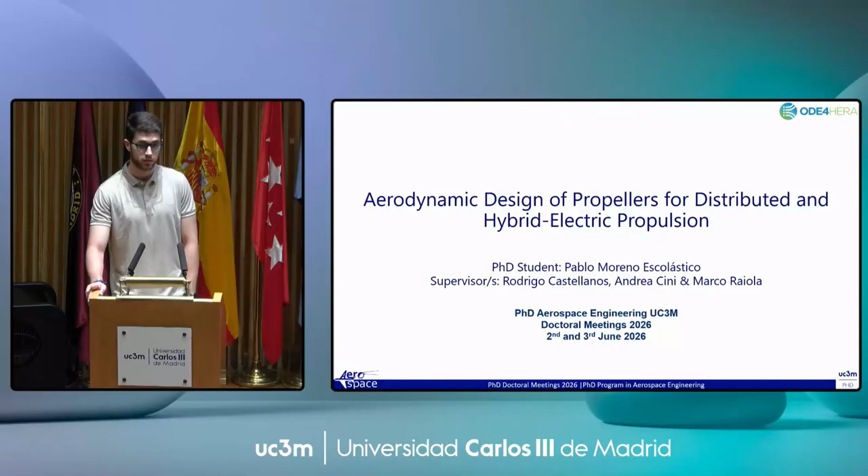My name is Pablo Moreno Escolástico. I'm working under the guidance of Rodrigo Castellanos, Andrea Cini, and Marco Raiola. And, well, even though today we'll be talking about propellers, I would reshape the title of this presentation to something more like Propulsion System Optimization for Sustainable Aviation.

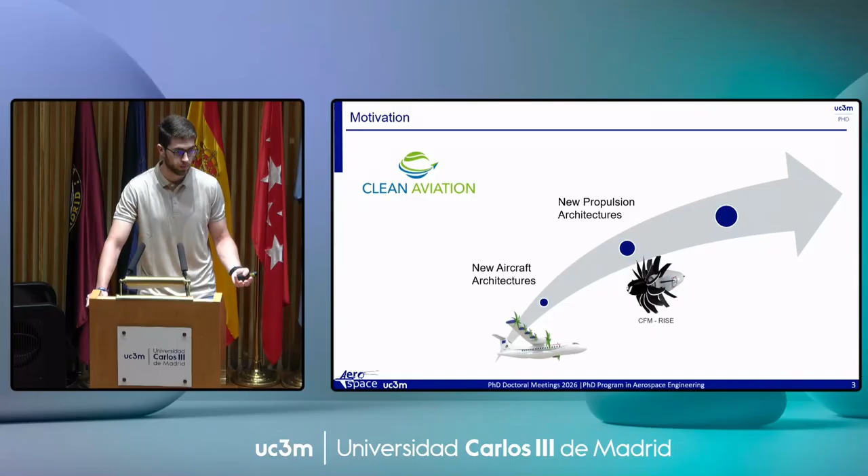Why? Okay. First, let's start with the motivation. As my colleagues have introduced before, especially Joao with the more innovative architectures and projects, especially under the umbrella of Clean Aviation here in Europe, these projects are pushing towards new aircraft architectures for more sustainable aviation and net zero emissions, which are pushing to have new propulsion architectures that are more efficient or with different arrangements than the ones that we know nowadays.

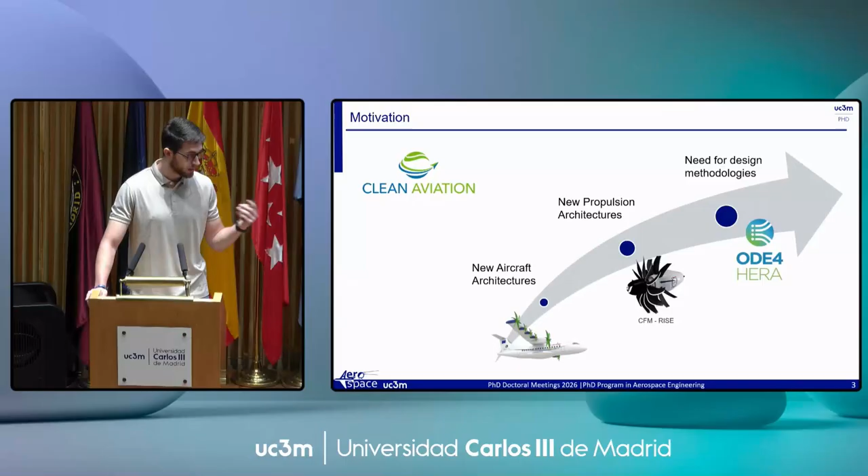This brings us to the need for new design methodologies, new design tools, which is indeed what we are trying to do in ODE4HERA, the project I'm working in, where we are trying to build an open digital environment for hybrid electric regional architecture. And all of this brings us to the question we want to answer, that is, how can we design the next generation of sustainable aviation propulsion systems?

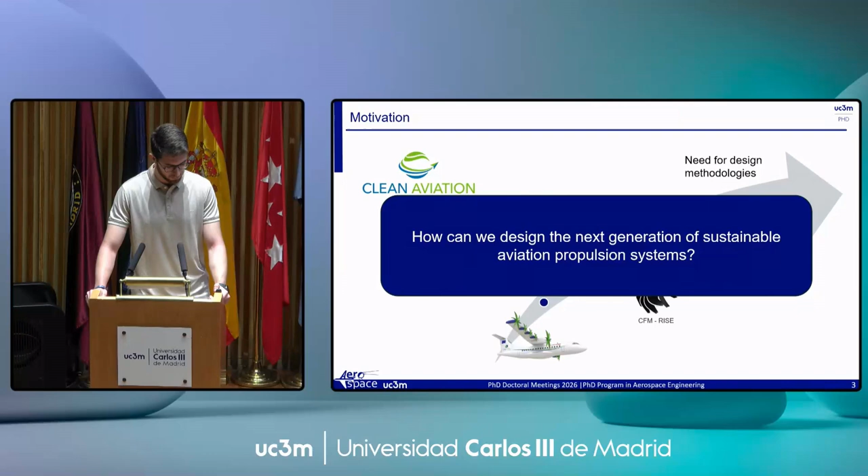For this, first we need to go to the state of the art. And here I would like to remark three main takes. First is that propulsion system design has become a more multidisciplinary problem, like the one that our colleague Raul published in 2024, where it is not only a multidisciplinary problem, but also a highly integrated problem within the airframe architecture.

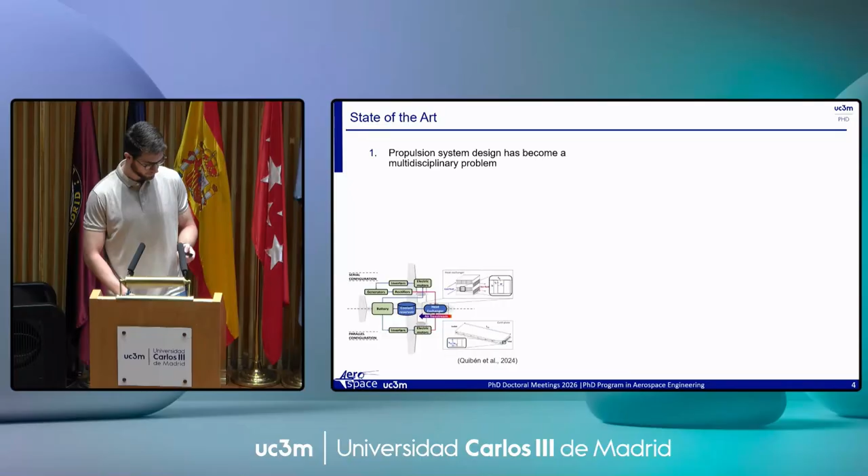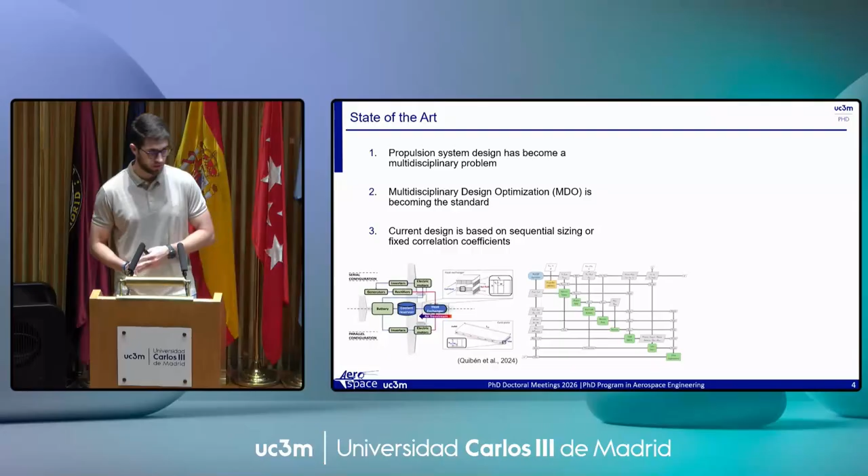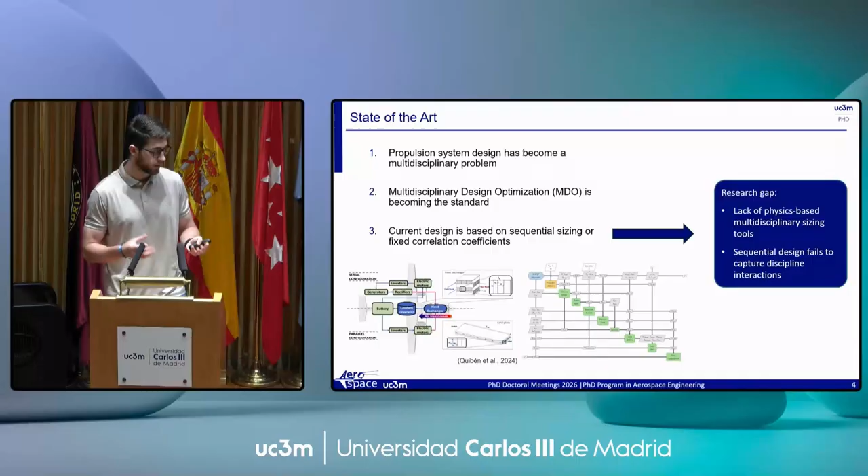Secondly, multidisciplinary design optimization, MDO, tools like GEMSEO that Joao mentioned, or OpenMDAO, are becoming the standard for this kind of analysis. However, current design tools and methodologies are based on either sequential sizing or fixed correlation coefficients. This poses two gaps, indeed. One is the lack of physics-based multidisciplinary sizing tools to have different performances along different conditions, and that sequential sizing design fails to capture multidisciplinary problems and the interactions between those subsystems and disciplines.

To address this, the objective is to build a preliminary design tool which is physics-based, to capture all the physics behind all the components, so all the system, but also perform simultaneous optimization to be able to understand all the interactions between all the systems and the components that are there, which are not few.

Then we want the design tool to be modular and incremental, to allow for as many architectures as possible, the different components, etc. So everyone can design their desired architecture with a few changes. And an important novelty of these tools would be that they will not only do mechanical sizing or mass estimation of the components, but we do both at the same time.

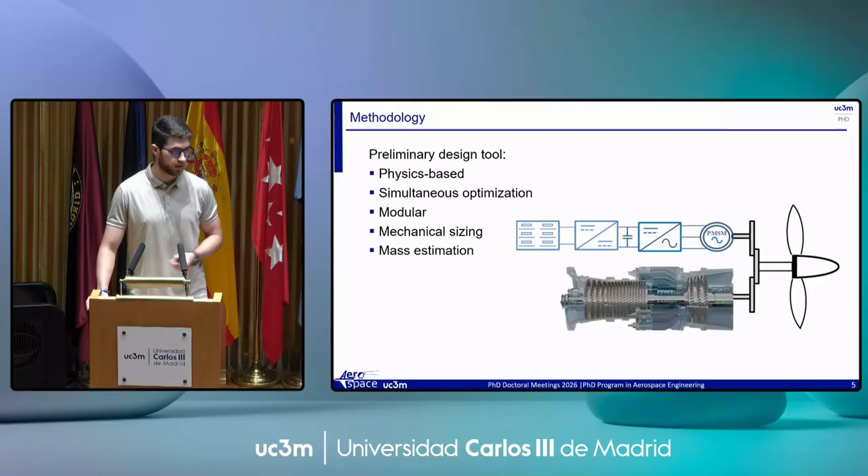However, a hybrid electric power plant is a very big system with very complicated dynamics, so we decided to split it in three main parts that are very differentiable. One is the electric branch, the other one would be the internal combustion engine, the more traditional one, and the other the propulsive element, that is the propeller.

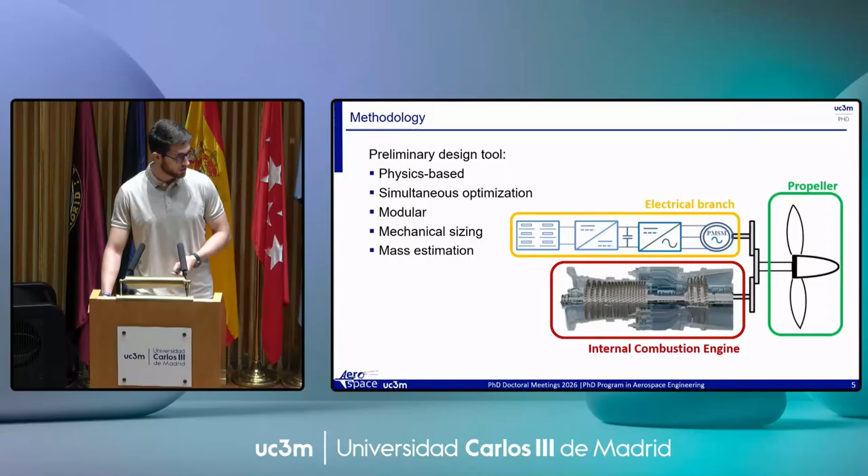We decided to start first with the electrical branch, where we had to select an architecture for the hydrogen electric powertrain. For this, we need to choose a power generation system, which is the fuel cell, which can convert hydrogen and air into water and electricity, which will power an electric motor giving mechanical torque to the propeller to generate thrust. And we also need to alleviate all those electrical losses that are transformed into heat.

So we also included a thermal management system, which is composed of an air inlet duct and a ducted heat exchanger. Not only that, but for the sake of completeness and modularity, we also included another power source, that is the battery, enabling either battery or fuel cell power or both of them.

Here is where the hybridization factor comes into play. You can find many different definitions of the hybridization factor in the literature. However, here we are defining it as the fuel cell power out of the total power of the system, meaning that if we have a hybridization factor of 0.7, the fuel cell is providing 70% of the power and the battery the other 30%.

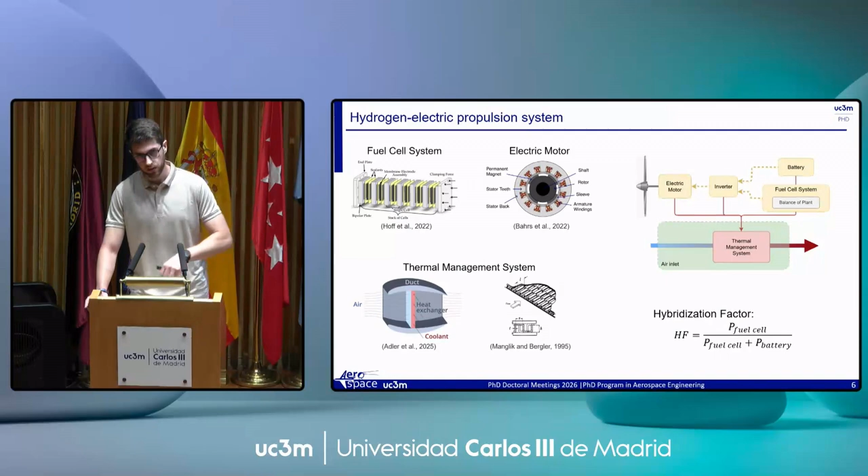Once we have decided our architecture, we can build our multidisciplinary optimization framework, which is based on gradient-based optimization. Specifically, for the moment, we have used the SLSQP algorithm that allows us to do gradient-based optimization using also constraints on the manufacturing side, on the operative side. They can be whatever we need. Once we have this framework, we can perform an analysis or optimization.

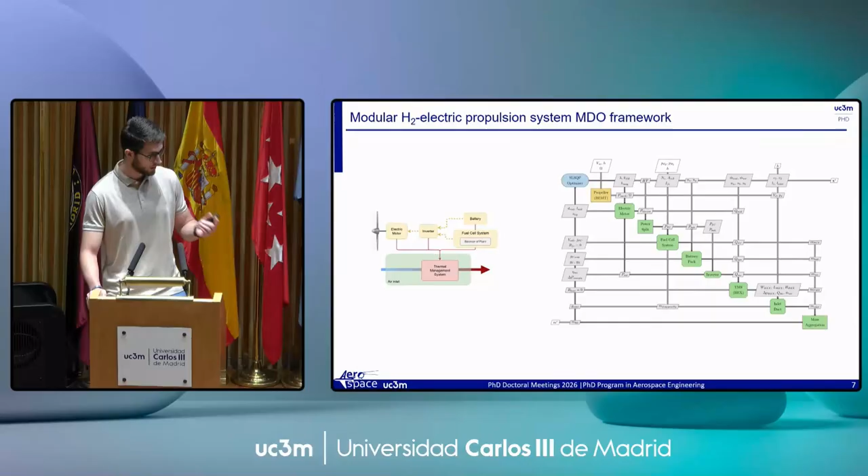In this case, we decided to select a use case of a small commuter, a Dornier Do 228, which is an aircraft capable of transporting up to 20 people, powered by two turboprop engines of a maximum power of about 600 kilowatts each. First, for this analysis, what we did was to size the powertrain for a fixed condition, which is the takeoff condition, the maximum power we have.

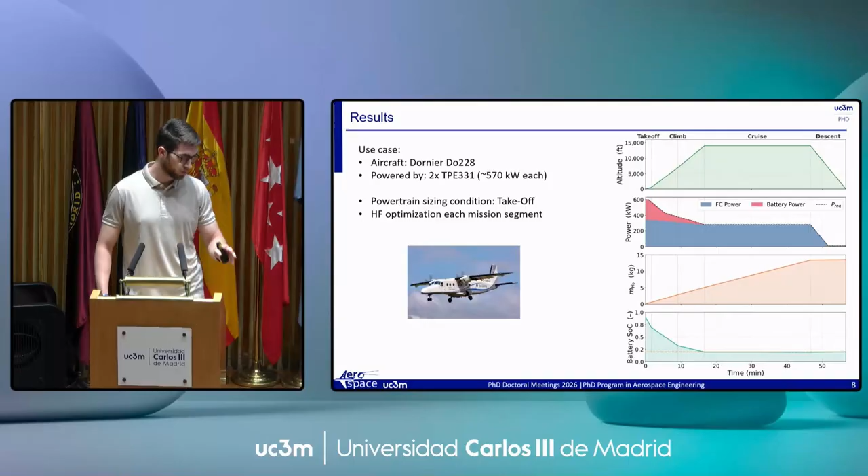And then once the geometry is fixed and we have our desired powertrain, we perform a second optimization, which is at the mission level. In this case, we are optimizing the hybridization factor achieved at each mission segment: takeoff, climb, cruise, and descent. So we have the most optimal flight profile that you can see there on the right, with around 40% of battery power at takeoff, decreasing until in cruise we have only fuel cell, which is lighter. At the end of the mission, as you can see in the hydrogen mass panel, for a 1 hour flight, we consume about 13 kilograms of hydrogen.

And to finish, I would like to pose the next challenges I will be facing. I said that we divided the work into 3 main blocks. However, each one of them is indeed very complex. The electrical propulsion is almost done. So once it's finished, we can move to the other 2.

First, the propulsive element, the propeller, where our objective is to expand the current BEM, blade element momentum theory, model capabilities that we have, including structural considerations to understand and study how deformation and deflection affect propeller performance, and to include also aeroacoustics, as Joao commented before. This is an important problem that is not always well studied for these devices, and also performing optimization of the propeller in terms of geometry and number of blades, and if possible, pitch or RPM control, which depends on the architecture you are choosing.

On the other hand, we have the internal combustion engine, which is more traditional, less innovative, let's say. However, this problem is very well known at the thermodynamic level, but not that studied at aircraft integration or in hybrid electric architectures. For this, we will perform a more detailed turbomachinery design, enabling also the usage of different fuels like Jet A-1, kerosene, sustainable aviation fuel, or hydrogen for combustion, and allowing different engines like turbofan, turboprop, or the novel propfan architecture, which is the one we have here in the middle, enabling more modularity and more incremental work.

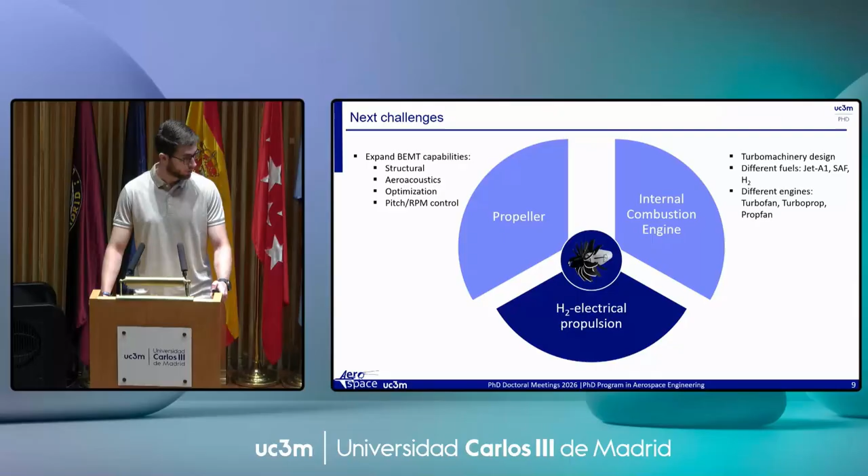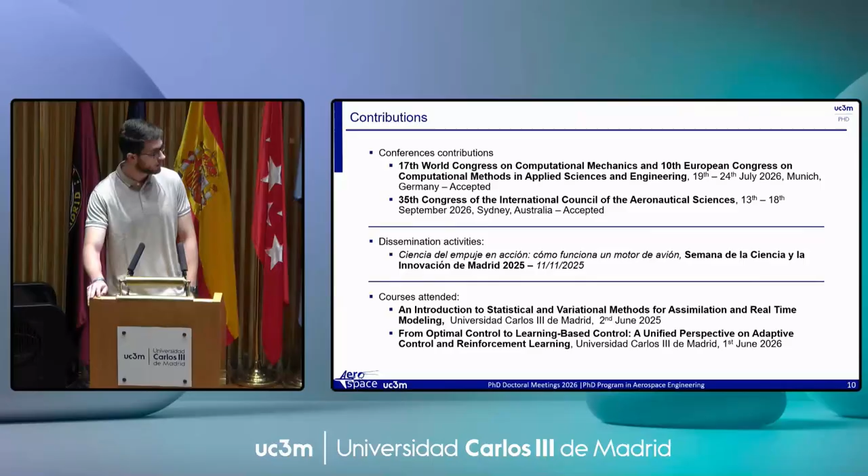These are the contributions I've made during this year. A couple of conferences I will be attending this year. We also sent an abstract for the EASN conference, where we are having a dedicated session of Out4ERA, and other dissemination activities and courses.